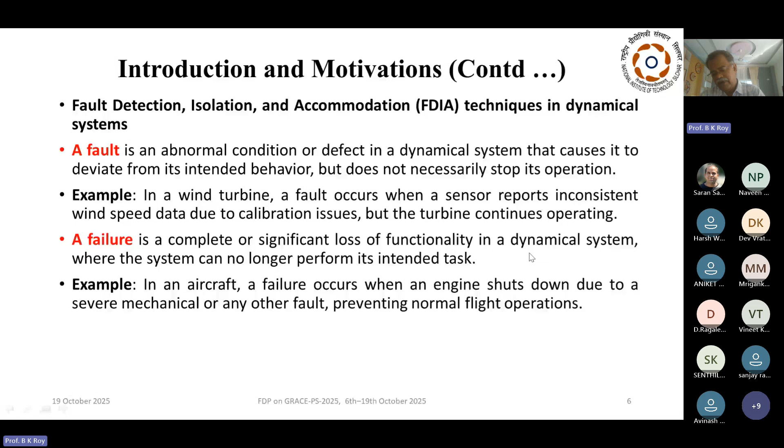Now, if there is a fault, what happens then? If we do not take care of this fault, it leads to a failure. So what is failure then? A complete or significant loss of functionality of the dynamical system, fine? Now, comparatively, a fault is an abnormal condition or partial deviation. In case of failure, it is complete loss of functionality, fine? Even with a fault, the system operates, but it operates suboptimally.

What happens in case of failure? The system stops or severely degrades. Detection: a fault is observable via monitoring, and failure is often detected when the system stops functioning. So the system comes to a halt. Example: a misaligned valve in a process plant is still working, but suboptimally because of the misaligned valve. Pump breakdown in a water system: once the pump is gone, there is no way to continue with that water system, fine?

Management: how do you do it? A fault can be managed. This is what you call fault accommodation or fault tolerance. Both are synonyms. And in case of failure, we have no other option but to go for repair or replacement, fine? Okay.

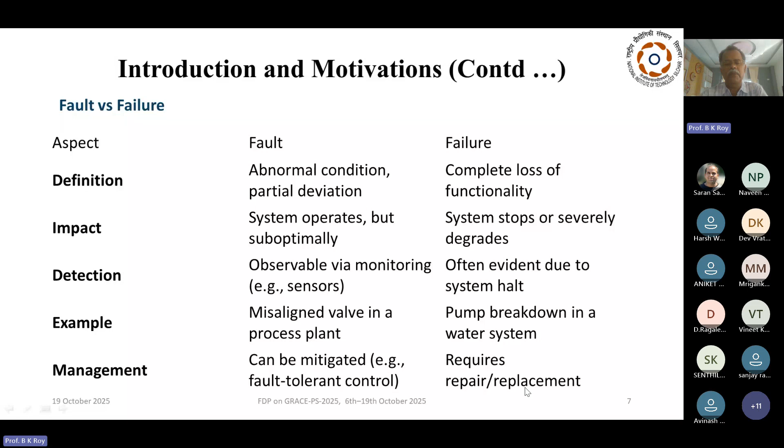Now, I'm so happy that there are a few industrial participants also. For them, it's a very common scenario: in any process plant, you will find a very big room from where you monitor all the functioning of the plant, fine? So this is something which tells us whether our systems are acting in a normal manner or there is some fault which got detected, right?

Now, after understanding the difference between fault and failure, as we have said, whenever it deviates from its normal operation, this is due to a fault. If we do not take care of that fault then and there, this particular fault gradually increases and finally leads to a failure of the system, which basically halts the system, fine? Now, the question is, how do you detect that fault? So what is the first process? The first process is fault detection.

So what is this process? This is the process of identifying the presence of abnormality, right? Now, so far as theory is concerned, practically it is also not very tough so far as detection is concerned. But next we will talk about something called isolation, something called diagnosis. That is basically the toughest part of it.

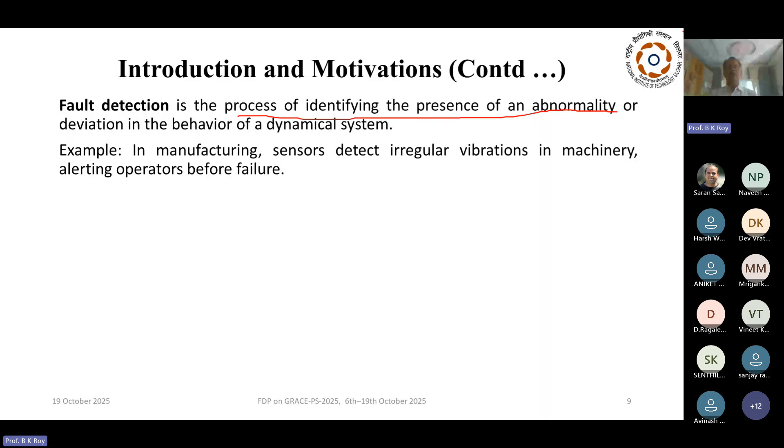Now, what is an example? In manufacturing, sensors detect irregular vibration in machinery, fine? So you have some sensors which detect some irregular vibration, but still your machine is running and it has created some kind of alert, fine? Some kind of alert that there's a fault in the system. This is your fault.

What is fault isolation? Fault isolation is also known as fault localization: determine the specific location or the component where that fault has occurred. So this is the location that we are talking about. Now, once you go to fault diagnosis, it basically identifies the type, magnitude, root cause of the fault in dynamical systems. So once you do the diagnosis, it not only gives which component, that is the location, but also tells you what exactly happened, what the cause is. So that's your diagnosis.

So we will consider diagnosis a superset of isolation. Isolation is a subset. With this particular background, we will basically replace the notion of fault detection, isolation, and accommodation by fault detection, diagnosis, and accommodation, with this explanation that isolation is a subset of diagnosis.

Fault accommodation, which is also known as fault tolerant control. What happens? There is a fault in the system. I do something in the system so that my plant continues to run. Obviously, it cannot run with its full capacity, but with a sub capacity, it continues to run. In a power plant, redundant pumps activate to accommodate a failed coolant system, ensuring continuous energy production. This is your fault accommodation.

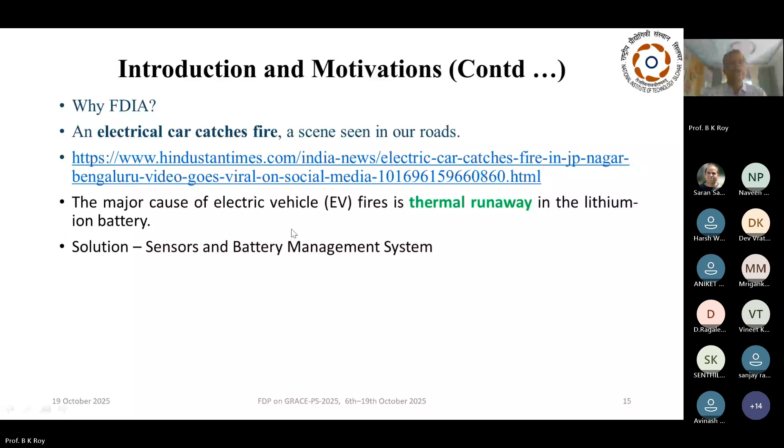Those who are working in this area know that during that time, possibly there was only one PMU. But after this incident, now we have plenty of PMUs giving us real-time information about the status of our system. We never wish this kind of scenario to recur in India. So we require that even if there is any fault, it should immediately be detected, diagnosed, isolated, and accommodated.

Aerospace industry is a life critical industry. In this life critical industry, we will see that redundancies are mostly hardware redundancies. Instead of one engine, there may be two engines. In place of one sensor, there may be three sensors, and we use some kind of voting logic. We will talk about it. Now, this YouTube video which I have noted here will take us to the very recent Ahmedabad case.

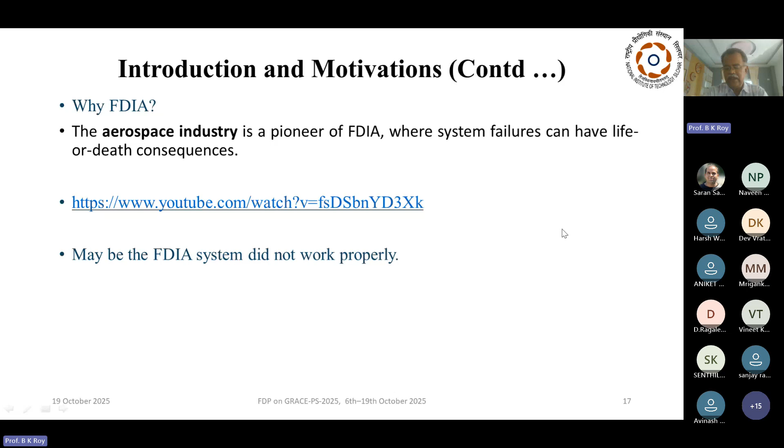Although we do not know now what exactly was the cause, one thing is very sure: fault detection, diagnosis, and accommodation, FDDA, is there, and it has been there in these life critical industries for many years. But it has not worked, and that caused the fatal accident. So we definitely do not want a recurrence of this. Therefore, we need an effective FDDA.

Now, industrial robots. These robotic manipulators are used for precise and repetitive tasks.

Now, if you see, let me go here and show you how series of robots...

Today, is it visible to you? Yes, sir. It is visible, sir. Arvind. Hello. Am I audible? Yeah, you are audible. I cannot hear. Your screen is visible, sir. Am I audible? You are audible, sir. We can listen to you, sir. So I'm not getting any response. I don't know what happened. At my end, seems to me things are fine.

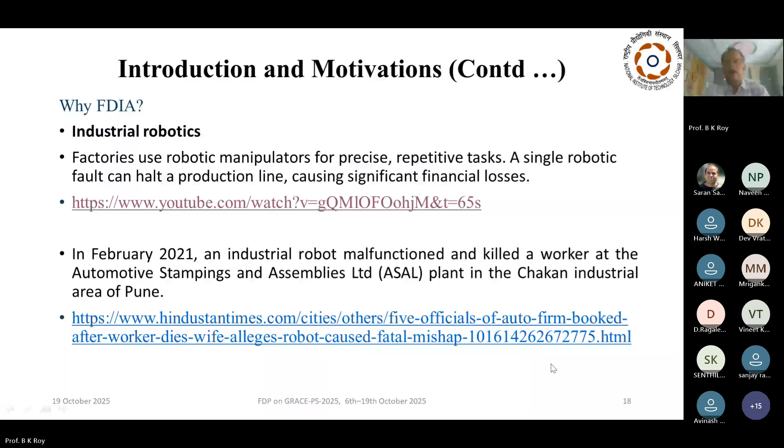So finally, if we sum up whatever we have seen, what is the summary? We desire a strong resilience of our power system even after a strong storm. That is basically the grid resilience we talked about. So who will be in the background? In the background, there has to be fault detection, diagnosis, and accommodation. Next, we wish our self-driving car reaches its destination without any accident. We safely use our EV car without any fear of system fault and contribute our share in reducing carbon emission.

We do not want a repetition of India's largest electrical blackout, a two-day event on July 30th and 31st in 2012, which affected over 620 million people across northern and eastern India due to cascading grid failure. We do not want a repetition of that. We all pray for a safe air journey and not to see a reoccurrence of the incident of the Ahmedabad air flight.

Industrial automation is unavoidable. Fine. So we would have to do it, but not at the cost of human safety and security. So therefore, this is unavoidable, but this industrial automation must come with safety of humans, security of humans, security of environment, and therefore we require fault detection, diagnosis, and accommodation. Therefore, fault detection, diagnosis, and accommodation is a must in today's industrial automation scenario.

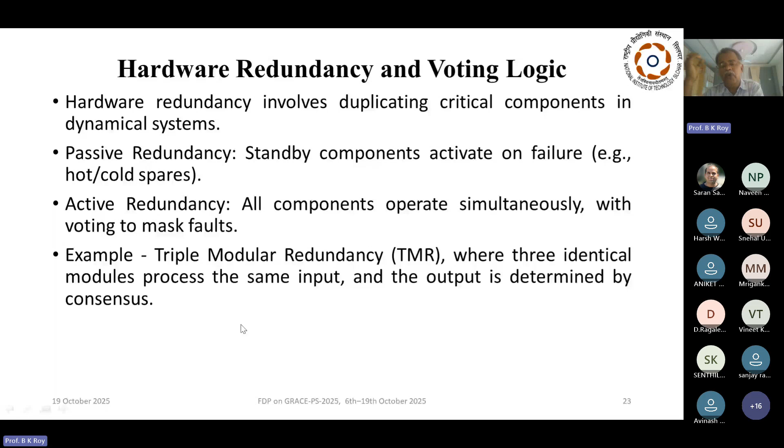This is the most common configuration which has been used: triple modular redundancy, where three identical modules process the same input and the output is determined by consensus. We have the same sensors or the same actuators excited by the same input. Ideally all three should give the same output if these are all perfect. So there is a check whether all three are giving the same results.

If all three are giving the same result, you take the output from any one of them and you continue your plant. But if they are not, then we go for a kind of voting. What is that voting? We find out of 3 how many readings are matching. So if the readings from 1 and 2 are matching, but 3 is not matching with them, then we presume that 1 and 2 are not faulty and 3 has become faulty. Fine.

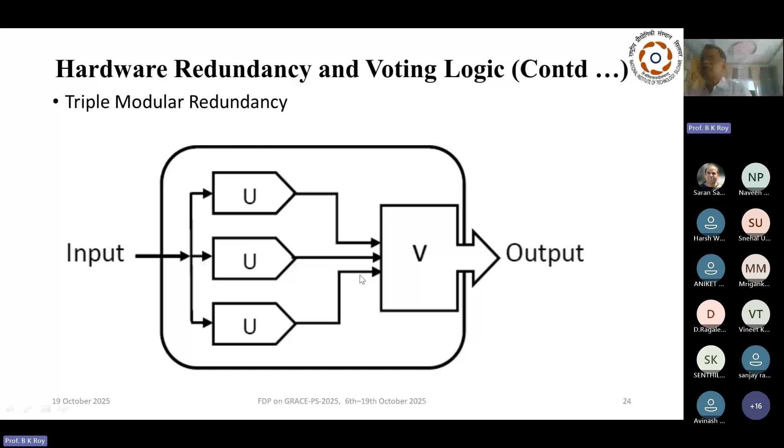This is our presumption using the voting logic, because the probability that 2 of them will simultaneously become faulty is much less than 1 of them becoming faulty. So this is our voting logic, which has been used in most life-critical plants, life-critical devices.

Hardware redundancy and voting logic: you can see it in aviation. The Boeing 777 has triple redundant flight control computers that use voting to handle sensor and actuator faults, ensuring safe flight. Then if you see spacecraft, NASA, Orion, they have not only 3, they have got 4 redundant systems with adaptive voting to accommodate radiation-induced errors in deep space. Fine.

In petrochemical refining processes, continuous operation of pumps, valves and distillation columns is essential; they want the plant to run continuously. Redundant power supplies and UPS prevent blackouts from causing hazardous shutdown. So they give a redundant power supply. If anything happens to the primary power supply, the UPS is immediately there, and from the UPS it will be taken up by the backup power supply. Fine.

In automotive manufacturing, robot assembly lines for welding and painting require precise synchronization. I was trying to show you that particular picture, which I could not. Painting requires precise synchronization to avoid defects or halts.

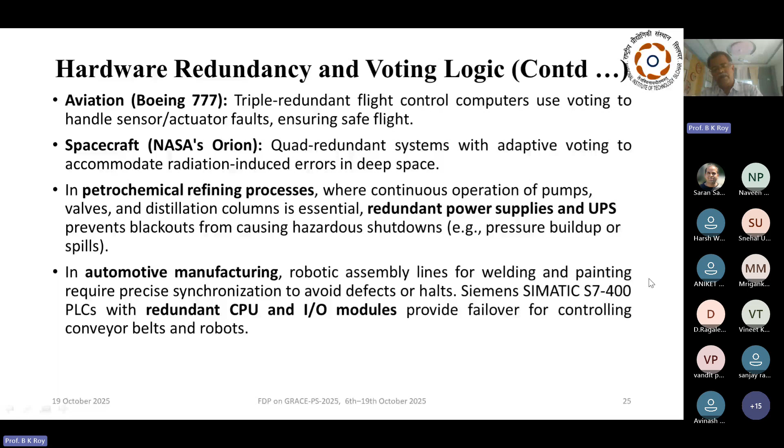Now we come to realize that fault detection, diagnosis, and accommodation are essential. Industrial automation today cannot succeed without an effective FDDA. Therefore, let us see how different approaches are classified. Fault detection approaches are classified mostly as follows.

They call it model-based, data-based fault detection diagnosis, knowledge-based fault detection diagnosis, and hybrid fault detection diagnosis. Here we will mostly concentrate on model-based. Data-based and knowledge-based are also used. Knowledge-based is used in many places.

For example, in agriculture there are now a number of expert systems or expert software. Once you give an image of your crop, it will immediately do the analysis and tell you if your crop is suffering from any kind of disease. These mostly run with if-then rules. Even in medical science there is knowledge-based expert software.

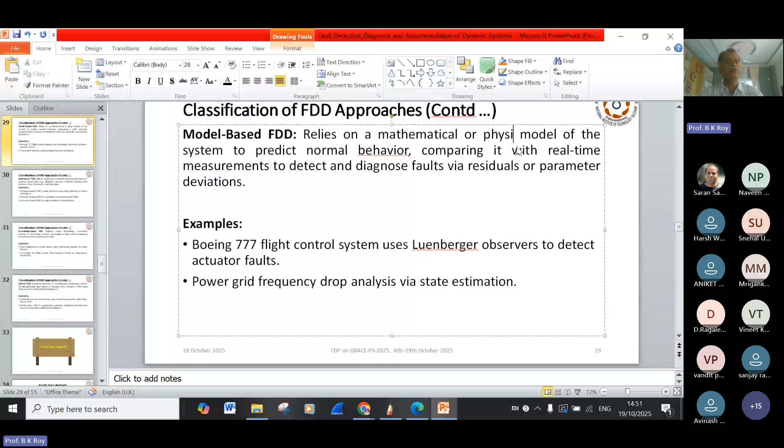Now, in model-based, it relies on a mathematical model of the system to predict normal behavior, comparing it with real-time measurements to detect and diagnose faults via residual or parameter deviations. This is what is called model-based.

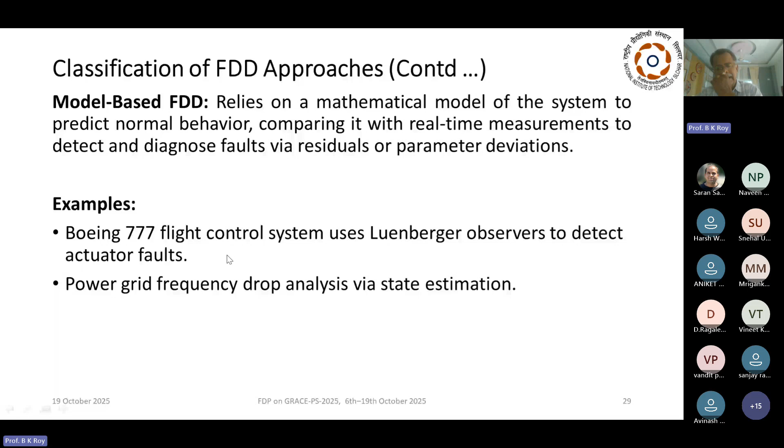So we will talk about how you generate your residual, and parameter estimation based methods. What is the example? The Boeing 777 flight control system uses a Luenberger observer to detect actuator faults. Power grid frequency drop analysis is done by state estimation. Now, data-based fault detection diagnosis.

What it does: I have n number of data. I do statistical analysis, or use a machine learning technique. If the data represent normal behavior, they give me some kind of properties. When not behaving normally, they show deviation from normal behavior. So I use statistical measures or machine learning tools to find whether my data are normal or abnormal. For example, vibration-based fault detection diagnosis in wind turbines using deep learning for blade imbalance.

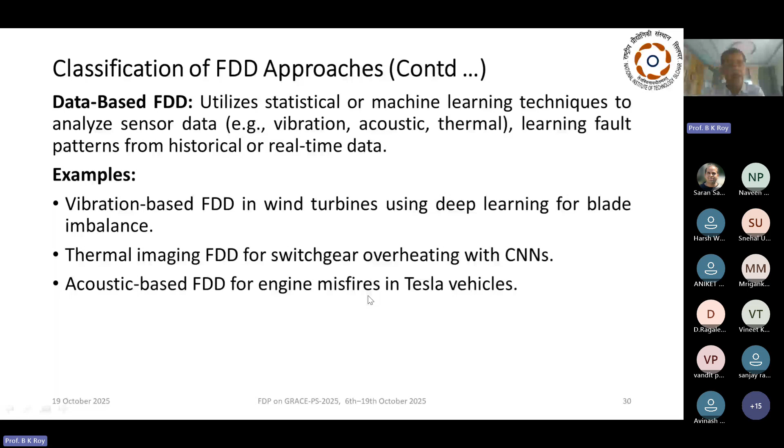Thermal imaging FDD for switchgear overheating using convolutional neural networks. Acoustic-based fault detection and diagnosis for engine misfire in Tesla vehicles. These are all in use. Fine. These are all data-based approaches which are used in the real domain.

Knowledge-based employs expert knowledge, rule-based systems or fuzzy logic to detect and diagnose faults, often integrating human experience with system data. Right? What are the examples? Examples are fault diagnosis in nuclear plants using a rule-based system for valve failures, and fuzzy logic for HVAC system fault detection based on temperature thresholds. Fine. So these are your knowledge-based.

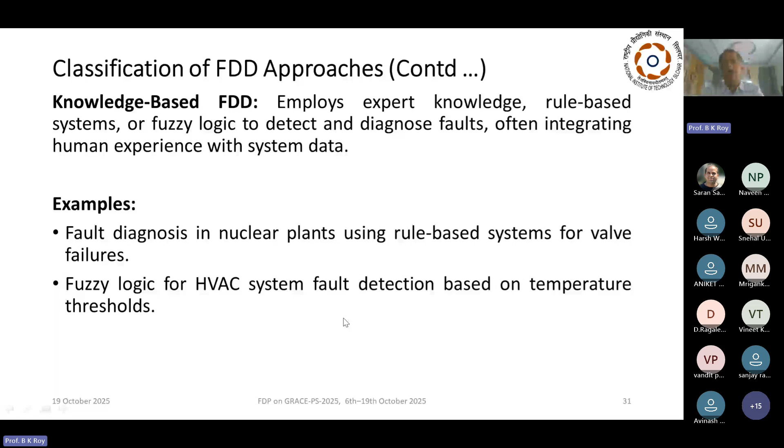Now what is hybrid? Combine elements of model-based, data-based, and knowledge-based approaches to leverage their strengths, often using data fusion or multi-method integration. So this is your hybrid. I take the advantages of all three, and then I go ahead with what becomes suitable for my requirement.

Now we have chemical process monitoring using model-based parity equations with data-driven PCA. So what is being used here, we will see that there is something called parity relation. It will come under model-based, and with a data-driven principal component analysis. So these two are combined to do chemical process monitoring.

Multi-sensor fault detection and diagnosis in autonomous vehicles, combining thermal and acoustic data with model-based validation. So we have the model-based, and we are getting thermal imaging and acoustic data. So data-based and model-based are combined, and then we are doing FDD for an autonomous vehicle. Okay. Now let us see the parity space approach.

Any questions from any of you? Yes, participants, if you have any questions till now, you can ask. If you don't, sir will continue. Sir, I think no one is having questions. Am I not audible to you? Yes, you are audible, sir. You may continue. Yeah, now I'm audible. Okay. Hello. Yeah, please tell me.

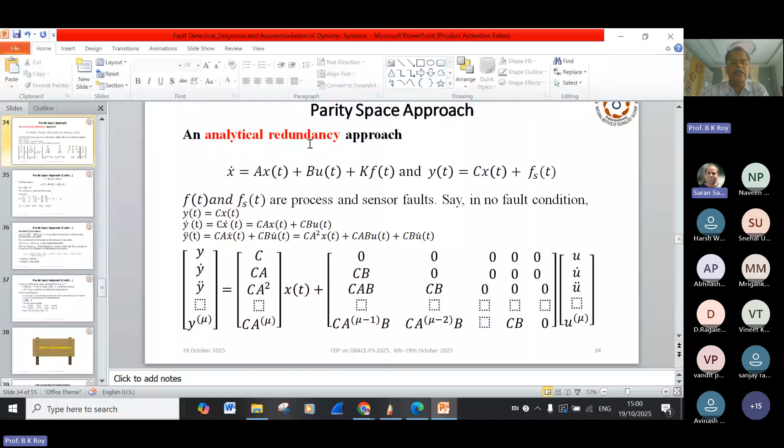And not only cost, in some places space requirement has become a big issue. So there you may not be able to go for hardware redundancy. Now, we have seen its importance, so we must have it. But is there any alternative to hardware redundancy? That alternative is called analytical redundancy. This is your analytical redundancy.

This is your analytical redundancy. So what I'm doing now, I am doing some kind of redundancy. But this redundancy is not in a physical mode. It is an analytical mode. I have done a lot of analysis. I have done a lot of mathematics. And after those mathematics, it has come this way.

Fine. So here, these are basically all coming under that model-based. So in the model-based, the first approach, which I'll talk about, is the parity space approach. Fine. Now, let me take this representation of any plant. This is our usual representation.

X dot equals AX(t) plus BU plus K F(t). So this is a process fault. And Y equals CX(t) plus F_s(t). So F_s is my sensor faults. Right? Now, when there is no fault, and please see it here, I have not taken any disturbance term. There is no disturbance. So in no fault and no disturbance condition, what is my Y(t)? Y(t) equals C into X(t).

Then let me do the derivative here. If I do the derivative, I'm getting Y dot(t), that is equal to C into X dot(t). I'll do a little bit of mathematics, and whatever I'll do will be understood by all of you. So I'm just replacing what is X dot. After replacing, I'm getting CAX(t) plus CBU(t). Fine.

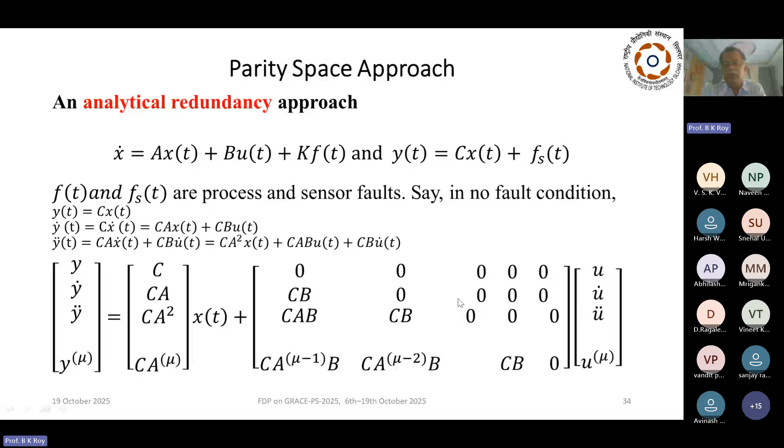So I go back and show you again. My problem was with x(t). So I will multiply it by some vector, so that this vector multiplied by this equals 0. So what will that give you? That vector multiplied by this minus that vector multiplied by this equals 0. So that will give you y minus Bu, which is equal to 0. Now, is mu less than n? More than n?

See, it all depends on how many rows I have to create, how many such vectors I require. So you require some vector in the null space of that matrix. Very correct. The null space should exist, that's what I'm thinking. Yes, exactly. You got the point. So basically, my problem here is that I need to find the null space of C mu transpose. So this is the null space of C.

So this is your null space of C mu transpose. This is what I need to find, right? Okay. So therefore, I basically put the number of columns here, so that I get some solution of this null matrix. So what is this I'm doing? I have got C mu transpose into omega mu. This is equal to 0.

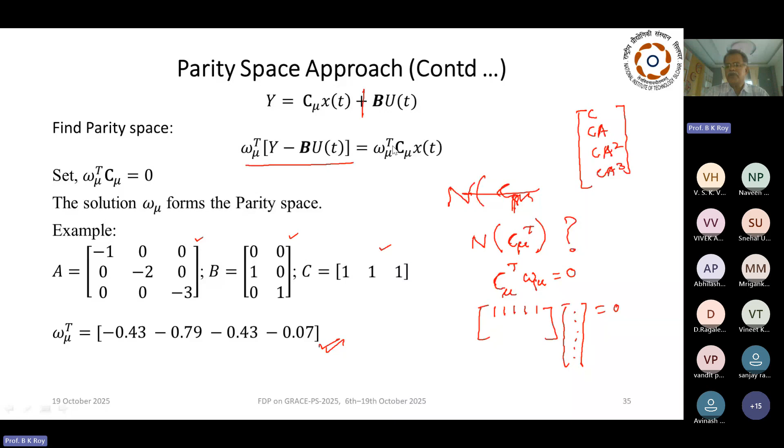Fine. Tell me. I wanted this to be equal to 0, correct? Omega mu transpose C mu xt equals 0. I never wanted omega mu transpose C mu equals 0. Fine. This is something that I've done. So therefore, tell me, is this a sufficient condition, a necessary condition, or a necessary and sufficient condition?

Okay. Anyone? This is a sufficient condition. Fine. This is a sufficient condition because the moment I make this equal to 0, then the whole term will become 0, because 0 multiplied by anything equals 0. Right? Now, there are two issues that we need to understand. All right. What are the two issues?

First issue, this was not our problem. Our problem was this one. Correct? This was our problem. What is the next thing? The next thing is that this C mu got generated from the AC pair. But this AC pair will vary.

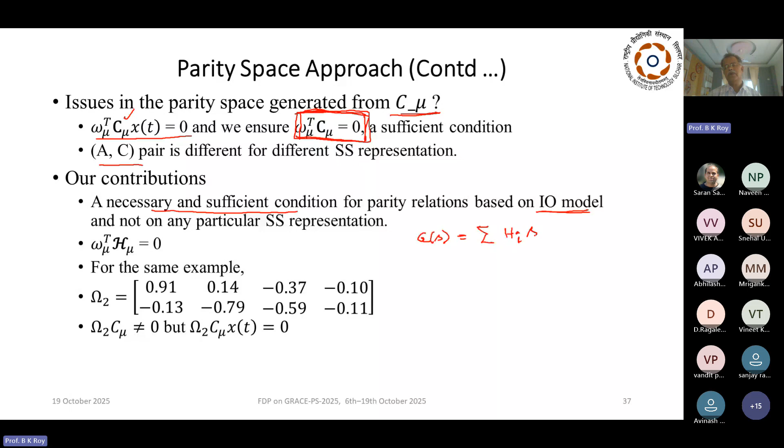Okay. Now, after a lot of mathematics, we finally have come to this: it's not omega mu transpose C mu, rather it is omega mu transpose into H mu. What is this H mu? H mu is like this. Now I have this transfer function matrix. This transfer function matrix can be represented in the form Hi into s to the power of minus i, and i is varying from 1 to infinity.

What do you call Hi? Any of you? I think it's a Taylor series expansion, a power series expansion, sir. Power series, and what do you call this Hi? These are your Markov parameters. Yes, sir. These are your Markov parameters, right? These you can write this way also: C into A to the power of i minus 1 into B, and i is varying from 1, 2. So this Hi is from your input-output model, and these C, A, B are from your state space model.

Fine. So after all these derivations, we have shown that this H mu is equal to H1, H2, up to Hn; H2, H3, up to H of n plus 1; then you have H of mu plus 1, up to H of mu plus n. So this is H mu.

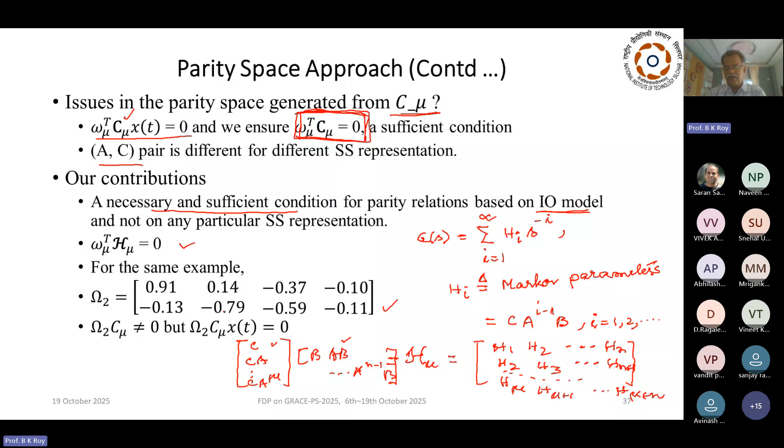So now let us go to the next approach. What is your observer-based approach? In this observer-based approach, I'm just showing you the initial part of what we basically do. We have to generate a residual. So how do you generate your residual? Your residual is the output that's coming from the plant minus the estimated output which you have generated using your observer.

Now, what should be this value of r(t)? All those discussions hold here also. This is equal to 0 in an ideal situation, but this r(t) should be less than r_th for a practical situation. Fine. Now, this is a disturbance term. So we have our standard Luenberger observer, L into y minus y hat, and y hat is equal to C into x hat(t). Then our residual is this.

Now, there are so many different types of fault detection observers reported in the literature. What I'm talking about is something I did maybe during 95, 96. Not only the simple Luenberger observer was there, but there were many others. So what was our contribution? Our contribution was asking: are they all isolated? For example, is the way you design your Luenberger fault detection and diagnosis observer completely different from the eigenstructure assignment fault detection observer, the unknown input fault detection observer, or the factorization approach? For simplicity, I have taken a few. We tried to see whether there are any similarities in their approaches or whether they are all completely different.

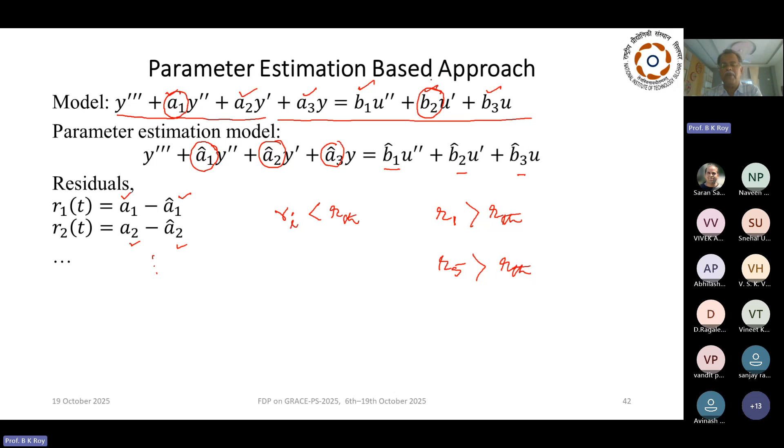Now you need to do diagnosis. You need to do isolation. These model parameters may not give you the clue as to which are the physical parameters. So what you need to do is find out which physical parameters are responsible for these model parameters to vary.

So if I write it this way, I have the model parameters which are a function of my physical parameters, right? This is not only a nonlinear function, it's a very complex function. In most of the examples I have done, I have found this is a very complex function. So what is our problem? This is a small f.

So our problem is to find the physical parameters. We have to find this inverse mapping from the model parameters. Once we find this kind of inverse mapping, that will give me the values of your physical parameters. I hope you understand the difference between physical parameters and model parameters.

For example, our standard second order equation: s squared plus twice zeta omega n s plus omega n squared. All these together give me the model parameters, but zeta and omega n are the two physical parameters. So in a plant there will be many physical parameters, and those physical parameters appear in some combination in your model. That is your model parameter.

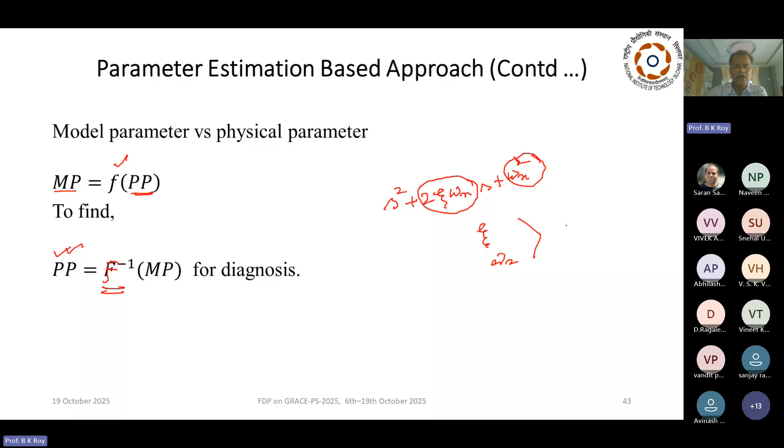Okay. Now, fault accommodation.

What we understood is that there is a fault in the system. We accept that fault and then we reconfigure, we do something so that my system runs at least in some suboptimal mode. Right? Now, what I'll do here, I have just taken some case studies from our country. So this will not only show how fault accommodation is done, but also establish why this is a must in today's industrial automation. Right?

So the first example is a thermal power plant failure, NTPC Dadri, Uttar Pradesh. What happened here in 2019: a 210 megawatt turbine experienced a bearing fault due to vibration anomalies, risking a full unit shutdown. This is what they detected. The vibration sensor detected the fault via real-time monitoring.

Diagnosis used model-based residual analysis to isolate the bearing issue. So here vibration sensors are used, which is again a data type. A model-based analysis is also done to isolate the bearing issue. So what I'm trying to emphasize, if you note, both data-based and model-based have been used. So they are going for some kind of hybrid method.

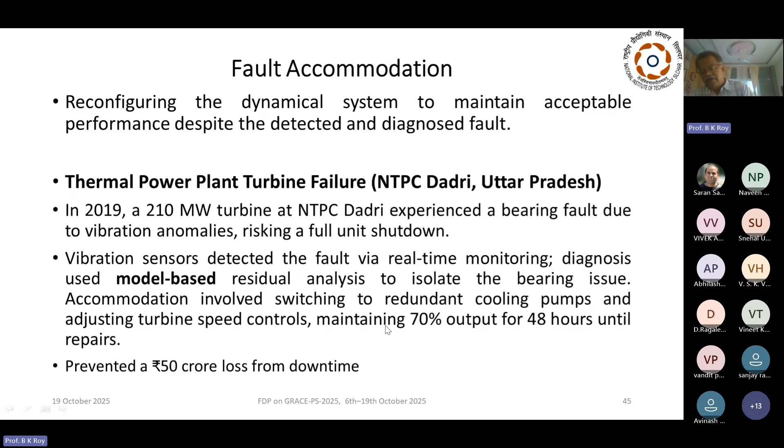Accommodation involves switching to a redundant cooling pump and adjusting turbine speed control, maintaining 70% output for 48 hours until repair. So they have run their plant at suboptimal condition for 48 hours until the repair is done. They have said this prevented a 50 crore loss from downtime. Otherwise, as it's been said, risking a full unit shutdown. So they ran that plant and saved 50 crore. Let us see the next one.

This is Tata Steel Jamshedpur, a steel mill induction motor. This is a case in 2022. An induction motor in the hot strip mill developed an electrical fault from insulation degradation, threatening rolling operation. Thermal imaging and current signature analysis detected overheating. Diagnosis pinpointed winding issues.

Accommodation activated a redundant motor drive and reconfigured a PLC to redistribute load, sustaining production at 85% capacity. So they have used redundancy, and this is a passive type of redundancy. They were not using this particular motor there. They activated it once they got that fault.

Next, you have UltraTech Cement, Gujarat, a cement kiln process fault. In 2021, a kiln in the Magdalla plant faced a refractory lining fault, causing a temperature spike and potential clinker quality degradation. How did they detect it? Acoustic emission sensors, again a data-based method, flagged cracks. Model-based simulation diagnosed thermal stress.

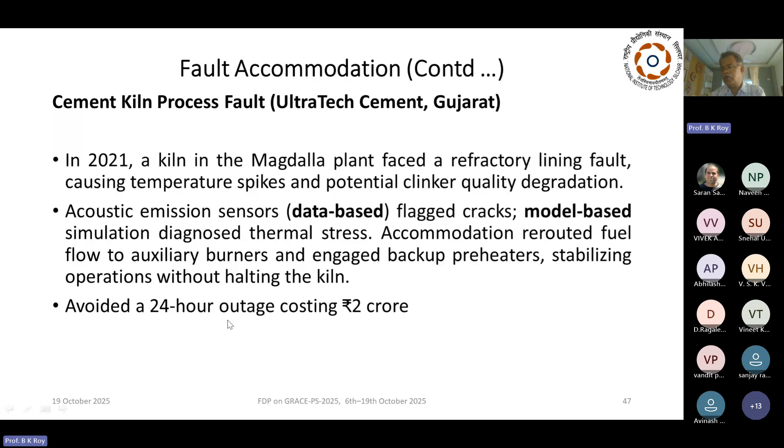Accommodation rerouted fuel flow to an auxiliary burner and engaged a backup preheater, stabilizing operations without halting the kiln. So this is the accommodation they did. Now, what is their benefit? They avoided a 24-hour outage costing 2 crores. So they saved 2 crores by this.

Power grid transmission line fault in the northern grid. The 2012 Delhi blackout precursor involved a 765 kilovolt line fault from insulator flashover during monsoon overload. The phasor measurement unit detected voltage sag in real time, diagnosed via impedance-based isolation. Accommodation used redundant lines for load transfer and dynamic line rating adjustment, restoring balance in 10 minutes. By doing all this, they mitigated a potential nationwide cascade.

My last one is a pharmaceutical mixer fault. In 2023, a high shear mixer in an API production line suffered a gearbox fault from misalignment, risking batch contamination. So the whole batch would get contaminated because of that gear fault. That is the loss. What is their monitoring system?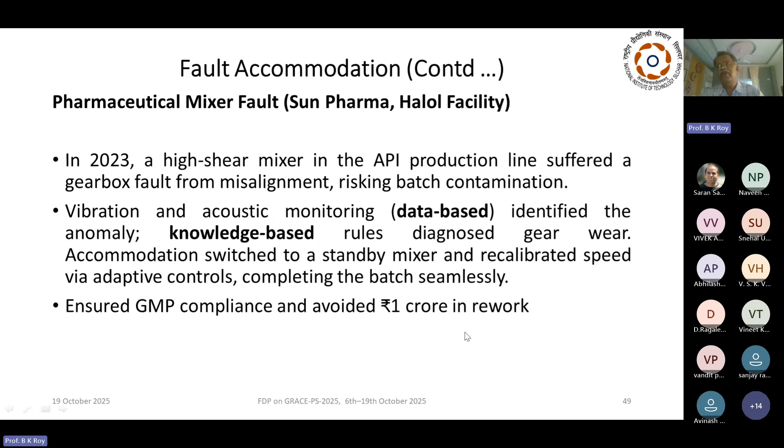Vibration and acoustic monitoring identified anomalies, knowledge-based rules diagnosed gear wear, and accommodation switched to a standby mixer and recalibrated speed via adaptive control, completing the batch seamlessly. This ensured GMP compliance and avoided 1 crore in rework. So this is the scenario of industry today. Those who feel that you can do something in theory, please note there are many industries who will be your takers if you have a better algorithm than the available one.

Okay, now coming to the conclusion and take-home. What are the concluding remarks? Fault detection, diagnosis, and accommodation is a must in today's complex processes. For life-critical processes, aeroplanes, aerospace, the space shuttle, and also nuclear power plants or some petrochemical plants, physical hardware redundancy may be used. In other processes, analytical redundancy may be implemented.

Now, in analytical redundancy, what we have seen today is model-based. In model-based, we have seen the parity space approach, the observer-based approach, and the parameter estimation-based approach. There are many others.

Data-based: you take the data and then you do some statistical analysis. You use some machine learning. You use some AI tools, and then you try to find whether they are normal data or they are coming from some faulty section. If they are faulty, then what type of fault do these represent, right?

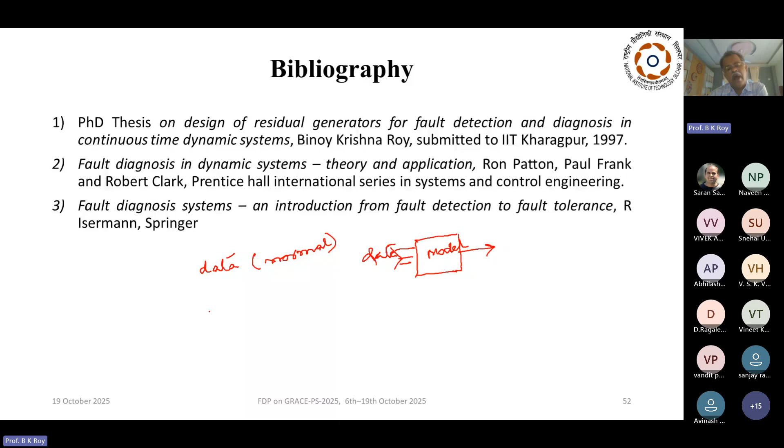Now, theoretically, I generate faulty data for different kinds of fault. Let me write it this way: ith faulty data. So this is the ith type of fault I have created, and I have taken the data. Now I have one more model. This model represents my ith fault model. So now I am comparing these outputs, with i varying from 1 to n for the different types of faults. This is my normal system, and this is my actual plant, so I'm getting output data from the plant. All of these I'm comparing.

What is expected is that there may be a fault of one type at a time. If there is a fault, this will say that there is a fault because it will deviate, and this will say which fault has occurred. The ith fault model will show that the response, the summation from these and the actual output, is zero. The rest will all show non-zero. That will tell me that there is a fault of the ith type. So this is the general notion which is used in data-based, in observer-based, everywhere. This is basically how they diagnose the fault.

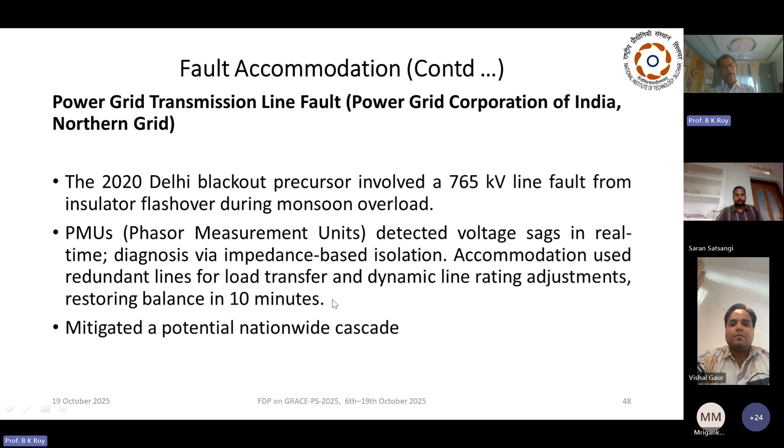Fine. Maybe you are doing something. If you write back to me, possibly we can look at that problem, why it did not work, or whether it should work at all. So we can take up that issue. Any other questions any of you have?